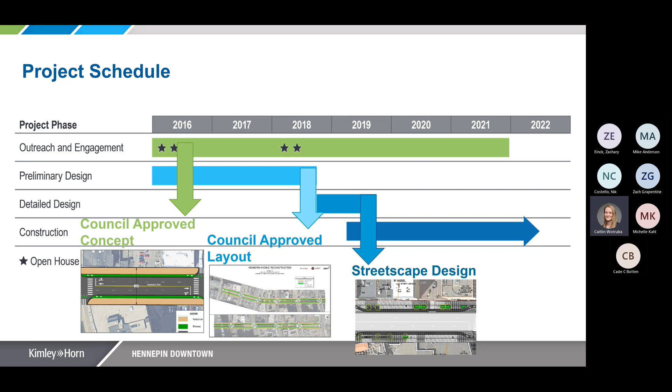That's you, isn't it? Yeah. So, don, make sure the green light's on.

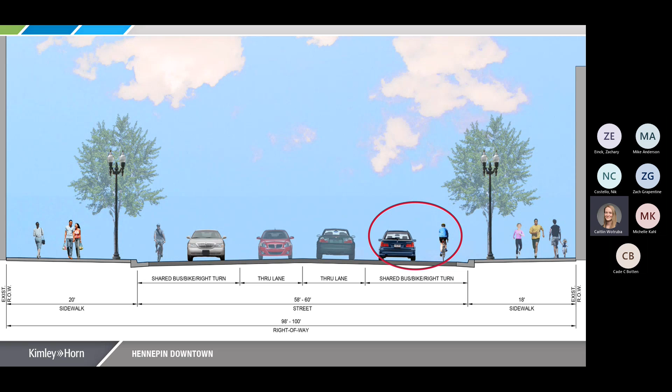Don mentioned Hennepin Avenue is part of the theater district. So another part of the design we needed to think about was how does the street work for transportation, but also how do we design it so it works for activations and events. Some people, the only time they come downtown might be to see a Broadway show on Hennepin Avenue. So how do we accommodate those types of crowds in the evening or other times? It's not just a transportation corridor, it needed to feel like a special street, and that's part of where the streetscape came in.

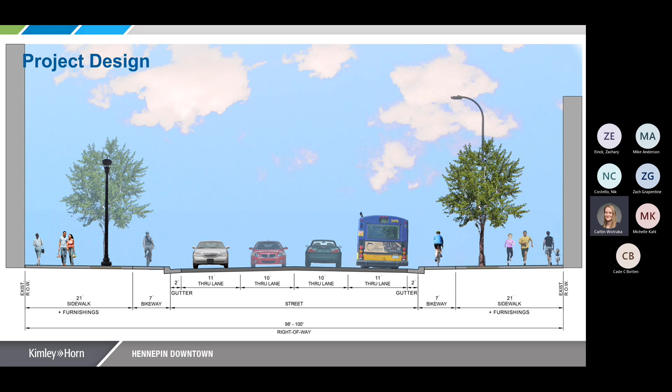So back in 2018, at that time arterial BRT consisted of the A line, but this Hennepin was envisioned to be part of the E line, which is now in design but at the time was not funded, had not gone through the corridor planning process. But this is a 30 to 50 year street reconstruction, so the design we come up with needs to accommodate this BRT project coming in a few years. So we worked with Metro Transit and had quite a bit of back and forth about consolidating bus stops - we went from 13 bus stops in the project to 8.

And then for the bus stops that were staying, to really enhance them and have facilities ready for BRT, and then also worked with the bikeway and sidewalk design we were working on. So you can see some of the features here. One thing I'll point out, and you'll see it in some images later, we spent a lot of time trying to figure out how transit passengers interact with people on the bikeway - how do we make sure there are clear sight lines, that we make it clear where people should cross the bikeway into the transit station, and how do we best manage those conflicts.

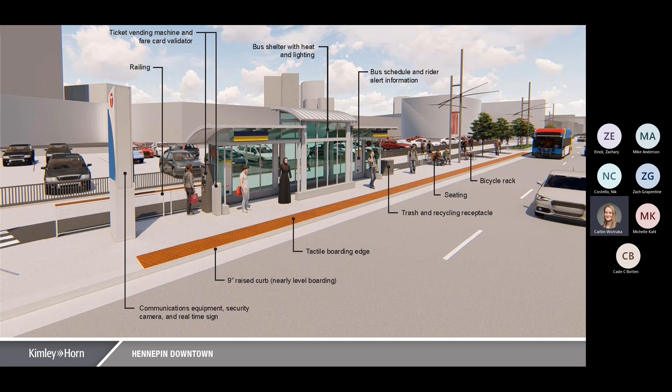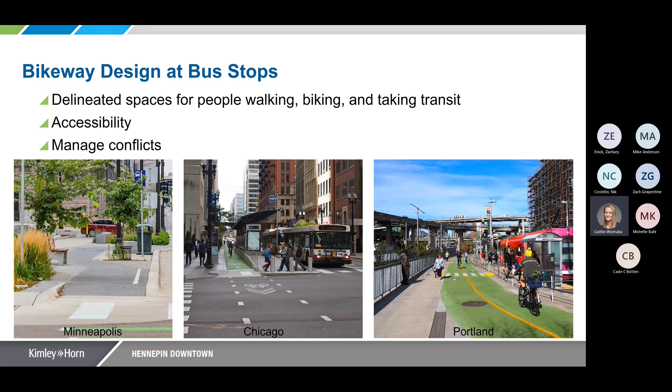So to get to our design, we looked at best practice in a number of locations around the country. You can see some examples on the slide there. The one on the left is actually Washington Avenue, which was built a few years before Hennepin Avenue. So we looked at some things there, as well as Chicago and Portland.

I don't think Casey Atkins is here. Casey actually made this, I don't know if you can tell what this is. It's basically a tactile exhibit.

We had a series of workshops with the Pedestrian Advisory Committee, Bicycle Advisory Committee, and the Minneapolis Advisory Committee for people with disabilities, to help explain to people with no or low vision how the transit stop, the bikeway, and the sidewalk relate to each other. Casey went to the craft store and made this little tactile exhibit so we could explain how the different elements relate to each other.

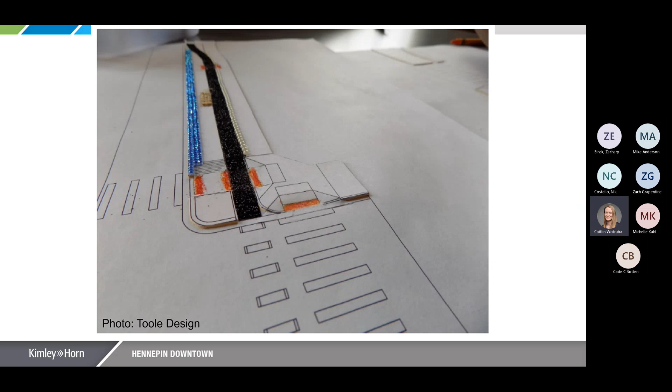One of the things we ended up including in the design, and was a first, was the tactile guide strips. These are located along the sidewalk near transit stations. So at the transit station we have the platform, we have the bikeway right next to it, and then we have the sidewalk right next to that.

One of the concerns was, for people who have low or no vision, how do they know where they can cross into the transit station? And how do they know if they're getting to the edge of the sidewalk and about to enter the bikeway? This was a new treatment that had not been implemented in Minnesota.

We did a bunch of research. We looked at best practices from other cities and other countries. And this is what we installed on Hennepin. These are some construction photos.

SEH was the construction manager on this project. They did a really great job of taking the design - we knew we wanted to do these tactile strips, we knew we wanted them to be this long - and they hadn't been done in Minnesota before.

The manufacturer only wanted to give us 6-inch wide strips, but we wanted 12-inch strips. They did a great job taking that and actually building something that worked and met the intent of the design, without really having an example to point to for how we should do it for this project. We did it over here, then did it again here.

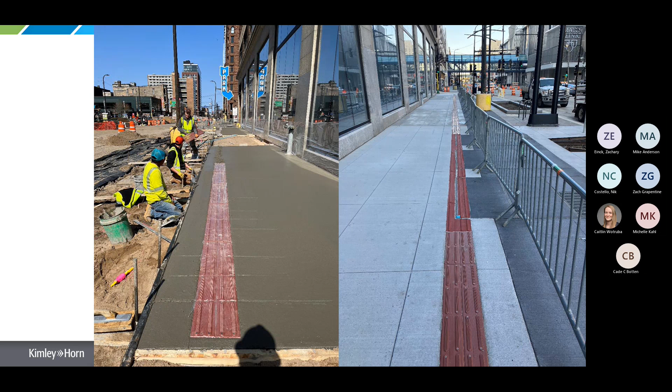Safety was a big part of the project, pedestrian safety in particular. On Hennepin Avenue, before the project, pedestrian and bike crashes were 10% of the crashes but 90% of the severe and fatal crashes. There were several fatal crashes on this corridor.

So we used protected intersection design, making those pedestrian crossings as short as possible, making the curb radii as tight as we could. In some cases 5 feet where we don't have right turners because of the one-way street system in downtown - really trying to tighten everything up.

In this particular design, because our bikeways are at sidewalk level, there is a mixing zone at the intersections where bikes and pedestrians need to interact with each other. We had some debate about what the right design was, but ultimately landed on doing what's safest for pedestrians - having that bike and pedestrian interaction behind the curb, limiting the interaction between vehicles and either pedestrians or bikes, making it as short as possible.

The other thing you can see here is that the bikeway pulls back away a little bit from the intersection so there's a buffer space where we have turning vehicles, for sight lines and for turning vehicles, to provide the safest design we can there as well.

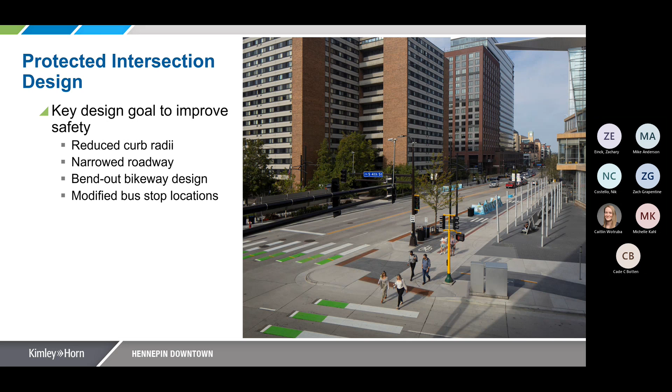And that's a photo of the linear guide strips after they were installed. This is the transit stop at 4th and Hennepin.

The other thing I'll point out in this photo is the blue slanted thing in the background - because the transit shelters weren't going to be installed for some time, there's plywood protection over the foundations that were poured. The Hennepin Theater District used it as an opportunity for public art, having a Native American artist design a covering to go over those. Those were out there for a couple of years, but it was a cool thing they wanted to do, and I think it made the project look nicer for the 2 years where we had a transit shelter foundation but didn't yet have a shelter.

Don mentioned the streetscape. There was $4 million of assessments to property owners, and some of the big things that funded were larger trees. We wanted to have more of a green impact on day one. Hennepin Avenue has a lot of events, but during the day or when there aren't events going on, we want the streetscape to look nice and not be all hardscape. So having larger trees and planters was important.

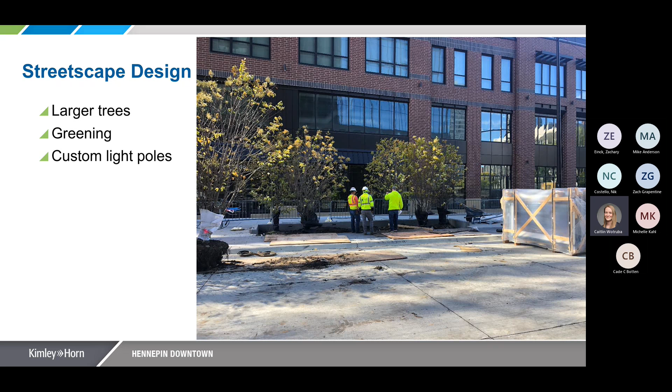And then we also incorporated custom light poles. We actually had a theater lighting subconsultant who worked with us to design these custom poles. They're inspired by theater rigging or theater mechanics. And the cool thing from the lighting perspective is they actually have 3 different arms, so you can aim the roadway light, the pedestrian light, and the bikeway light separately, and they look cool.

They also have the ability to—one of the things that wasn't funded, but the theater district had interest in doing sound and music or colored lights in the future. So these have the ability to add those things on in the future with the conduits that are already installed inside each of the poles.

Back to you, Don. Fun of construction. You're too nice.

You say, oh, we did some workshops—over 250 meetings, business by business. And yeah, we did have a lot of discussion on how to do the bend-in and bend-out bike lanes.

You're also too nice. Those were tries to figure that out and make it work. So thanks for being nice, you did a great job. You went to a lot of those meetings too. I was there.

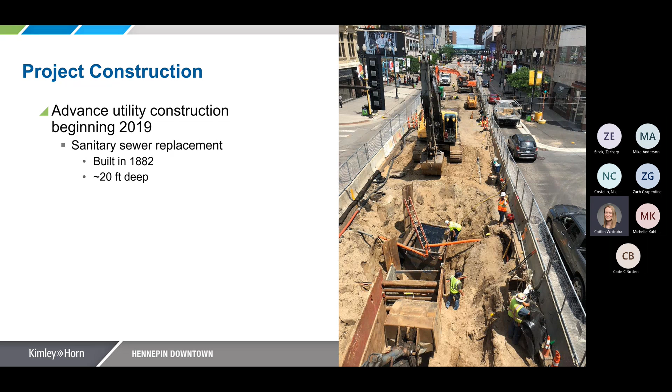Maybe that next slide is similar. Above all those sewer pipes, you have all the crossing lines. The beauty of wireless technology—there's a lot of wires under the street to make wireless happen, and they're everywhere.

Let me talk about risks. Maybe this is a good slide to talk about risks. The slide says 2019—go back to that schedule. I started construction with the project in 2019. So when you talk about risk, I was ripping up Hennepin before I even had the plans done, before I was all done. That's risky for an organization to do. You're betting on everything working out and coming together, because in order to keep a schedule, you got to start now—at least a full year of just utility work.

That keeps you awake some nights and wakes you up other nights, because you got to make sure it all happens.

The other thing about replacing sewer lines—they're active. You can't shut them off. You can't go to city center and say, for the next week, could you just not flush? It doesn't work. So now you have extensive bypassing to make it all work. Sorry, I'm bringing that up during the lunch hour. Apologize—it's just a function you need to be aware of.

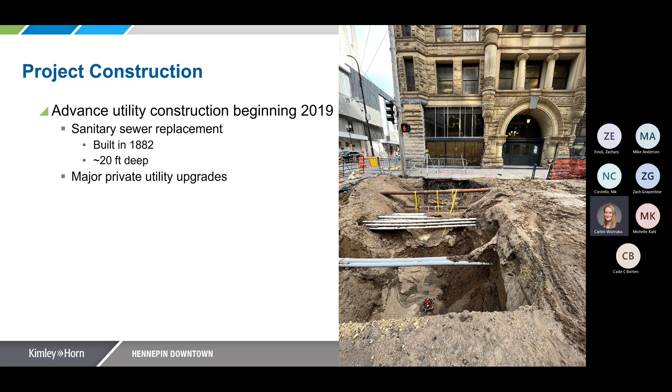Meanwhile, in other parts of the city during this time, I was saying 4, 8, 10, Hen—because 4th was under construction at the same time, 8th at the same time, Hennepin was being ripped up, and I shut down the 10th Avenue Bridge for a major rehab. At the same time, the state said we're going to shut down 3rd for a major rehab. So if you're trying to get into downtown, it was pretty tough.

Very scary to try to figure out how to get all those vehicles moving around and keep people getting to work. That's prior to COVID. So very challenging, not just digging the ground up, but trying to figure out how to get everybody to navigate around downtown. Another thing that might wake you up at night as you try to figure that out.

Oh wait, I got COVID in there too. So COVID hits on St. Patrick's Day 2020, that's when I sent my entire division home. I think we started construction maybe a week or two after that.

The contractor shows up and there's nobody there. I'm going, this is really odd, there's no one here. So the construction crew said, let's go, and they went as fast as they could. The bad side was all the businesses said, well, now you can go faster because there's no traffic. But it didn't quite work that way. That was a challenge to try to figure out.

As you all know, we all went through it. The murder of George Floyd happened, we had civil unrest, and that was a real thing to deal with as well, trying to make this all work in downtown Minneapolis. We had to make some changes along the way, had to be flexible and change our approach.

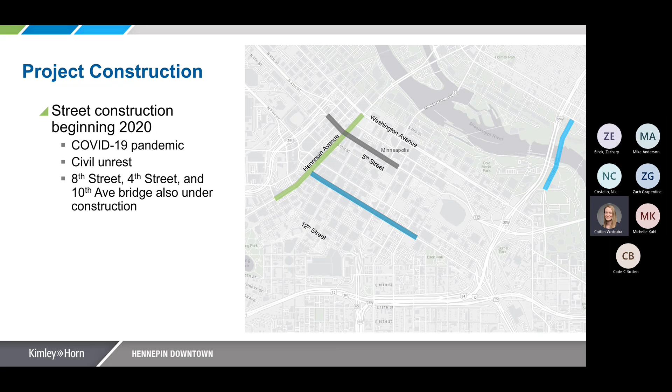Yeah, the street construction began in 2020. Maybe the biggest thing about this slide is when the public invests, the private sector will invest. If I look at 4th, 8th, 10th, and Hennepin, that's over, I'll say $130 million worth of public investment went into those projects.

The private sector invested too, whether it be new developments or remodels. All down Hennepin there are remodels. We saw that happen, and the return on investment is a very large number to revitalize downtown. This slide captures that, a lot of work going on the private side.

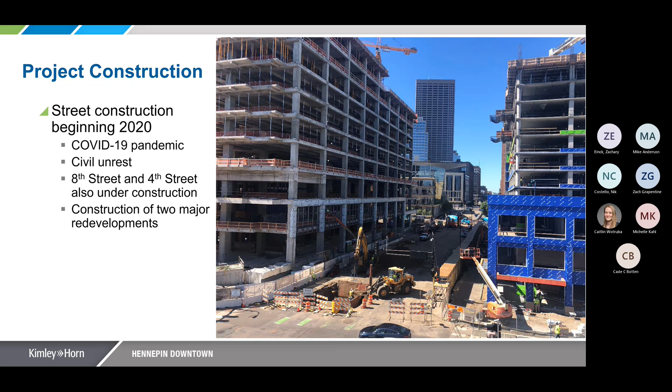Innovative solution. I don't think on a road project I've used concrete pumper trucks, but this one we did, because the staging to build concrete, how you build half at a time or a quarter at a time, figuring out how to get a truck in when you can. The contractor came up with this, great idea, quick operation, and you can get anywhere you need to in that area. So these are the types of creativity solutions a contractor came up with.

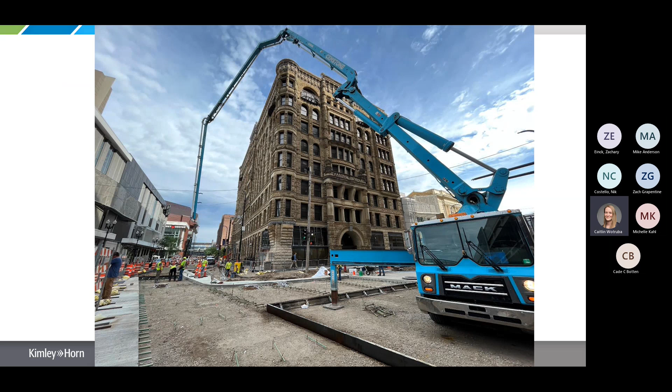Fun, because I'm not allowed to close anything. I have to keep it open to pedestrians, I've got to keep it open to transit. People still need to move around. We're getting better at it, but it's just another challenge to make things work out.

Oh yeah, back to you. Yeah, so I wanted to talk a little bit about lessons learned. This project construction finished in the fall of 2022, so we're still learning some lessons, but there are some things that even looking back a few years, three or four years, we can say, yep, that was the right decision.

Don mentioned we went through a lot of back and forth about the bend out bikeway design, and I think we came to the conclusion that was the right design. That's what the city has now in their street design guide, and that's what's being implemented on a number of projects. It really is for safety, for visibility of the cyclists, and it makes a better intersection design.

The tactile guide strips I talked about, the city is doing an evaluation of those. I think we're still learning, different projects have implemented them in slightly different ways, so trying to learn how people use them. What is the best application? Do we use them everywhere? I think we're still learning from that, as well as maintenance, because that was a big question too, how do these hold up over multiple winters? So this is something the city is continuing to study when we have these types of design situations, and we think it's a good solution, but we're still learning exactly how they will apply in the future.

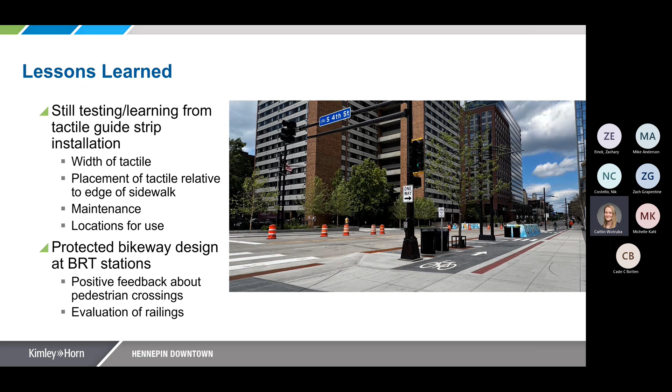I also included this photo, you can see the pedestrian crossings from the sidewalk to the BRT station design. We have gotten good feedback about that type of design. I'll flip to the not quite as pretty picture because there's snow, but you can see in this picture with the shelter and railings installed, we've gotten good feedback actually from Metro Transit as well, that this does help tell people where they should be crossing, and it does help manage some of those conflicts and make the expectations clear about where people should be.

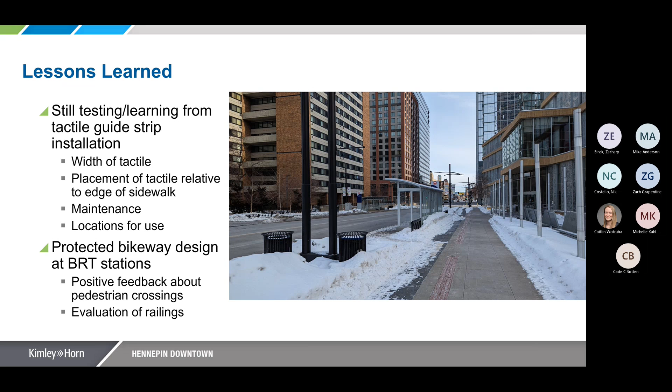So this is our wrap-up slide, so get ready, get your questions ready.

The other thing I was going to mention, Don, is it's much easier to build a driveway to a city parking ramp during COVID when there's no one parking there, and you can just shut the driveway for however many weeks you want to build that driveway. It's not good for city revenue, but it does make it a lot easier to build.

As Don said, this was a project that replaced critical infrastructure. It was really needed for the sewer, the underground infrastructure, and the street itself and how people are using it. We didn't have any more right-of-way to give, but we took that right-of-way and reallocated it to make it work better for all the people on Hennepin in all different modes.

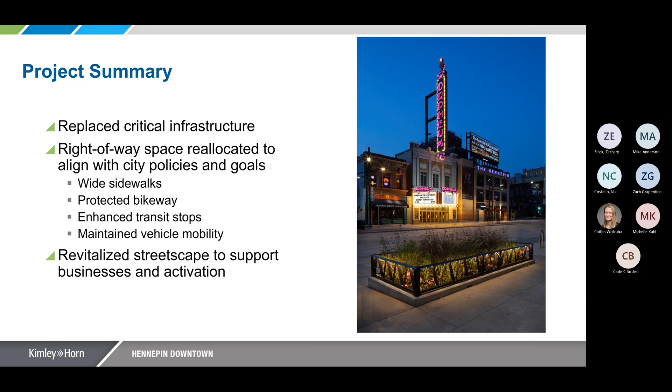So with that, we can answer any questions. I don't know—oh, Ruben?

A couple of maintenance questions: some great photos of the lower-height planting along the corridor, and also about snow clearance on the bikeway relative to the sidewalk.

Shovel the sidewalk. The question was about the maintenance of the landscaping that's out there, and then who shovels.

In downtown Minneapolis, we have the Downtown Improvement District, often called the DID. It's a special service district set up and paid for by the downtown businesses, and they go out and do the maintenance of the plants. They also handle snow removal and clearing, as well as plantings and banners on the light poles. The businesses pay for that.

On the maintenance side, the tactile strips took us a while to figure out how deep to put them so they're effective but not too deep. If they're too high, the plows shear them off when plowing against them, but if you're plowing along, it's fine, and if you use a brush, they work fine. These are the types of things we're looking at as we go along.